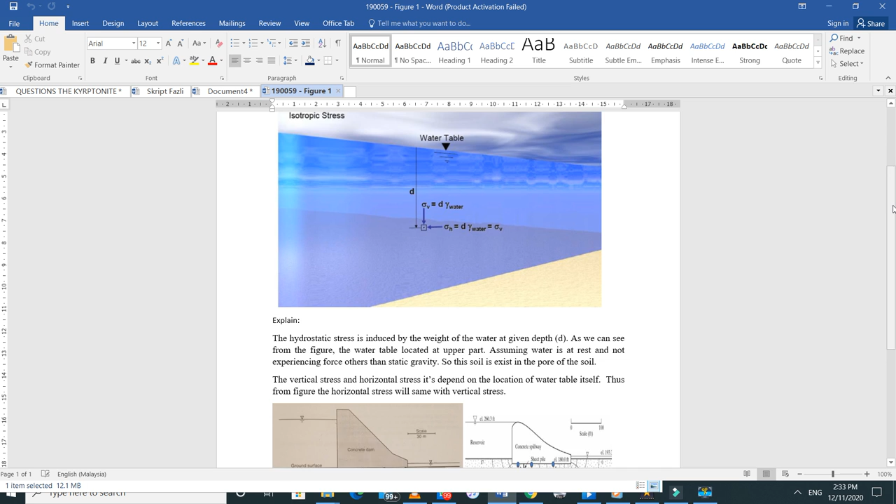Right, then what else can explain it? So some of you did explain about it being the same pressure, you want to find it at a certain depth, but based on depth the pressure will be higher. Because now we are talking about the unit weight of water, and unit weight of water also has a relation with gravity force and so on.

If you realize, vertical stress is equal to unit weight of water times D, or some of the books call it Z. Why Z, why D and so on? No, D is for depth, Z is also for depth, kedalaman, right? And then for horizontal stress it's equal to unit weight of water, also times depth, right? Same. So that shows it's equilibrium, same.

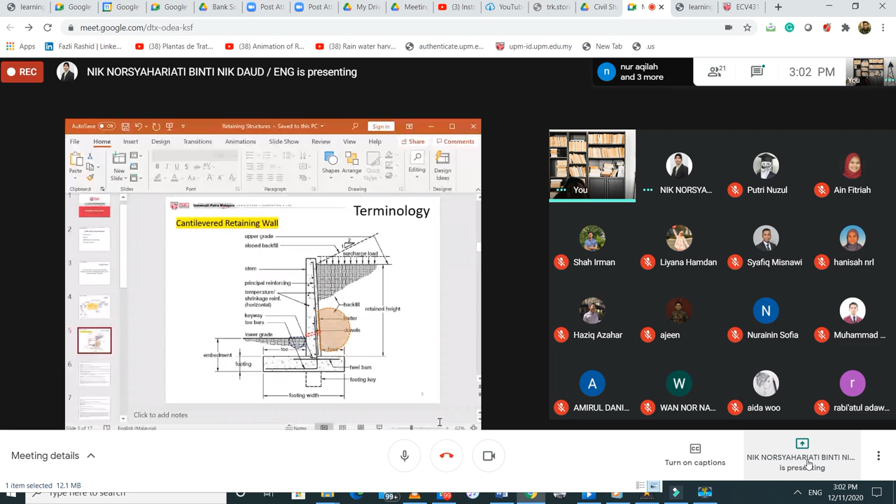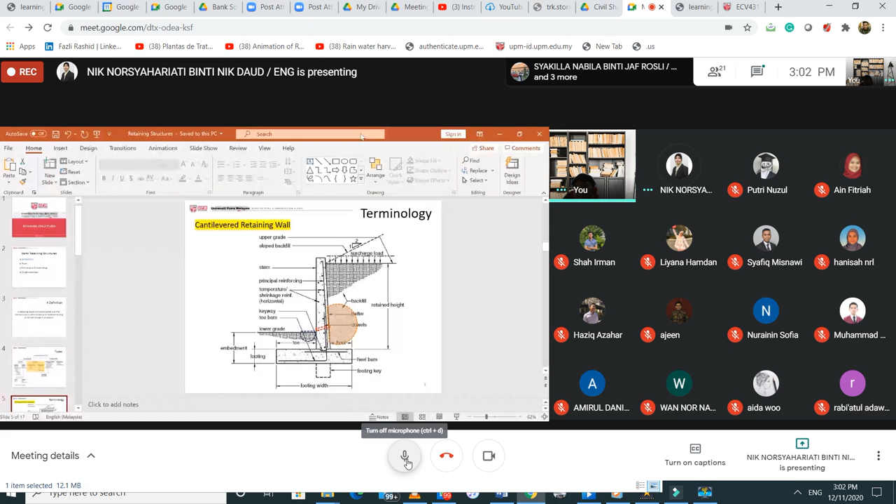You all tak stop saya, tengok saya bercakap je. Daripada yang first tu saya dah habis sampai 4, share 5. Entire screen okay ke doktor? Sorry? Entire screen boleh? Alright. Okay then, okay, right, for terminology.

Yang ni saya ambil daripada Brooks and Brooks, 2010, 10th edition, right? So yang ni kalau you nak tengok balik dalam terms of a big view punya ni, saya ambil daripada buku tu. Terminologi ni saya bukan nak kata you suruh memorize, but it's better if you can memorize, untuk cantilevered retaining wall ni, sebab retaining wall yang dipanggil cantilevered memang popular lah, kat Malaysia memang kita guna ni. It's very simple, and not saying that it's easy to design, but still.

Kat sini yang different daripada buku tu, saya ada tambah weep hole, dan some of the drainage kat sini longkang, dan some of the granular backfill. They use a backfill here, but it depends on which type of soil. Granular backfill ni keperluannya sebab untuk memastikan air boleh flow directly or easily to the weep hole kat sini, terus masuk ke drainage.

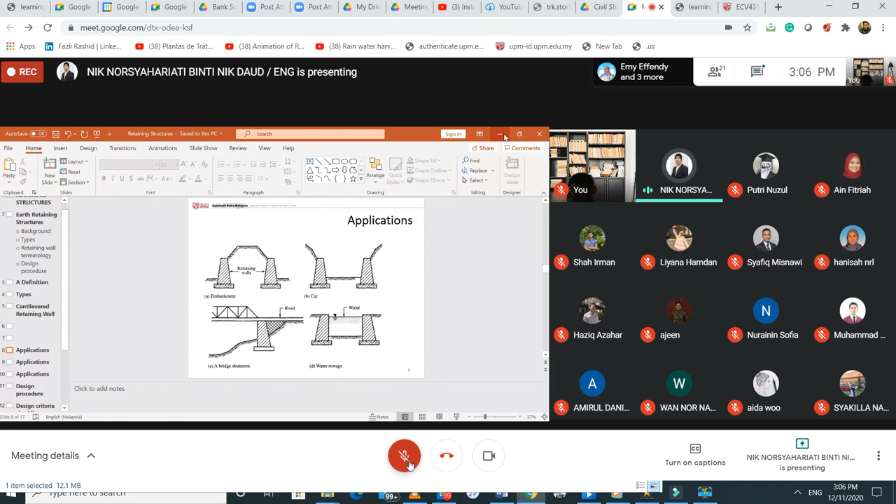Footing foundation yang paling simple sekali untuk you punya calculation. Alright, so ni pun saya ambil daripada buku tu, so you can just go through. Which is for each of the definition ataupun explanation about terminology atau terms yang digunakan, so application, some of it, ada explanation dalam books juga. Either one, your previous book, Craig's pun ada, boleh tengok balik. Then some of it, design procedure ni pun saya ambil daripada books, which is if you want to look at the design procedures, you need step by step method ataupun procedures yang you nak refer.

So it just goes back to your first assignment yang saya bagi, talking about the standard and regulation yang digunapakai di Europe, Britain, British standard, then some of Indians, and then Malaysian, Malaysian punya rules or regulation from JKR. JKR in English apa dia?

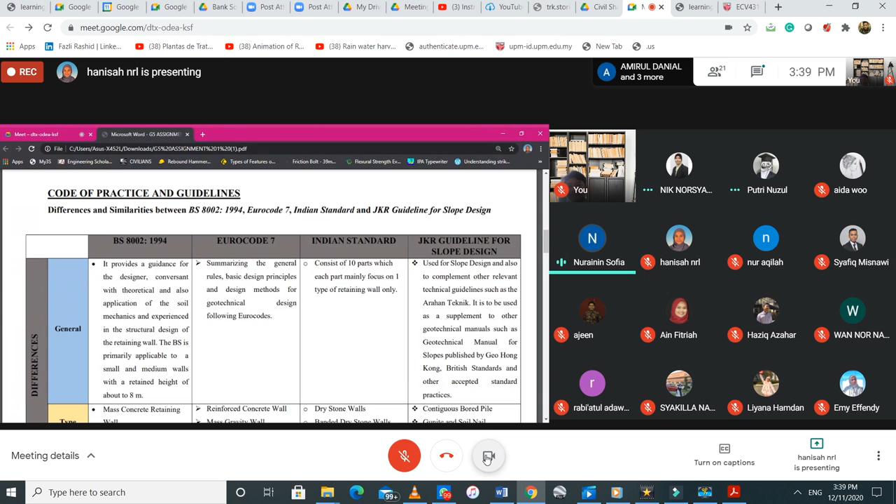Okay, focus on Indian standard and JKR. In general, Indian standard consists of 10 parts, each part mainly focusing on one type of retaining wall. For JKR, it is used as a supplement to other geotechnical manuals, such as the Geotechnical Manual for Slope published by Geo Hong Kong, British Standard, and other accepted standard practices. That is for the general aspect.

For the type of retaining wall, as you can see on the screen, these are the differences in the type of retaining wall for each code. For Indian standard, they have dry stone walls, banded dry stone walls, cement stone walls, gabion walls, RCC crib walls, timber crib walls, and more. For JKR standard, it consists of contiguous pile, RCC wall and micropile, RC wall and sheet pile, and other types of retaining wall. You can see there are differences in terms of type of retaining wall for these two codes. So next is the design criteria.

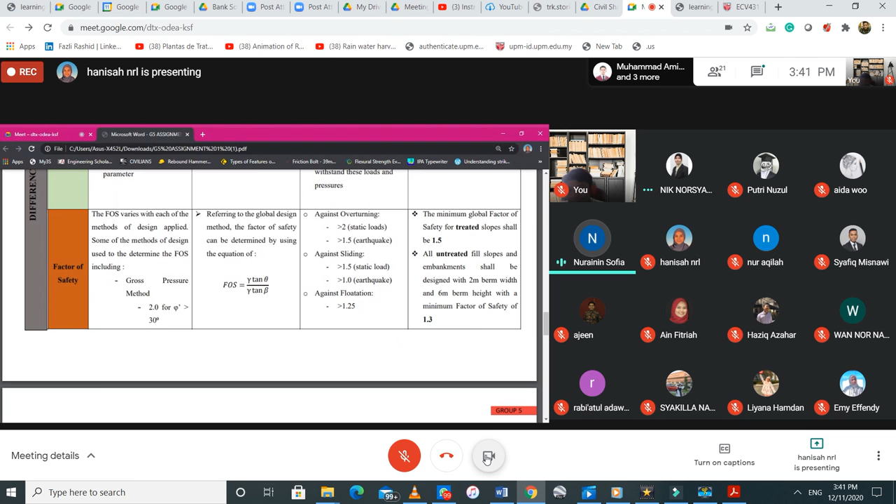For JKR, they mentioned that the minimum global factor of safety for treated slope shall be 1.5, and all untreated fill slopes and embankments shall be designed with 2 meter width and 6 meter height with a minimum factor of safety of 1.3. Okay, that is for the difference.

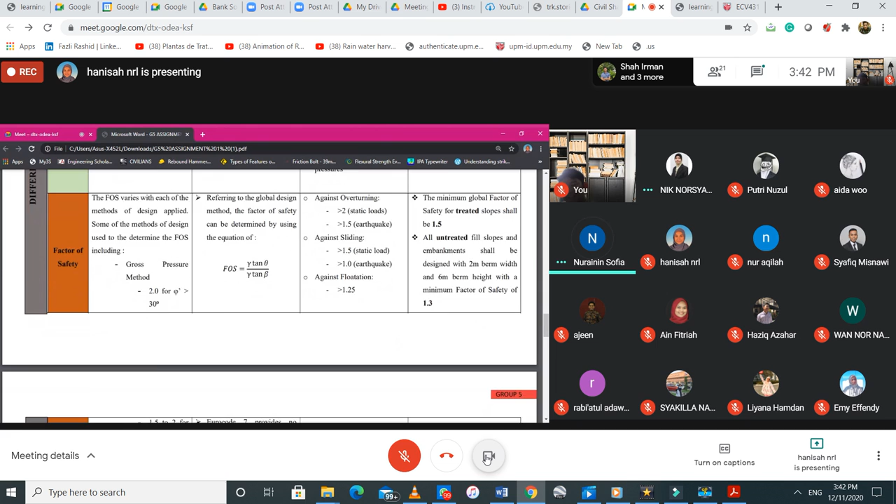For similarities, this applies to all 4 codes. All codes and practice guidelines above are used to design a retaining wall by providing guidance to the engineer. The objective for all codes is to increase the stability of the design slope and minimize the risk of slope failure.

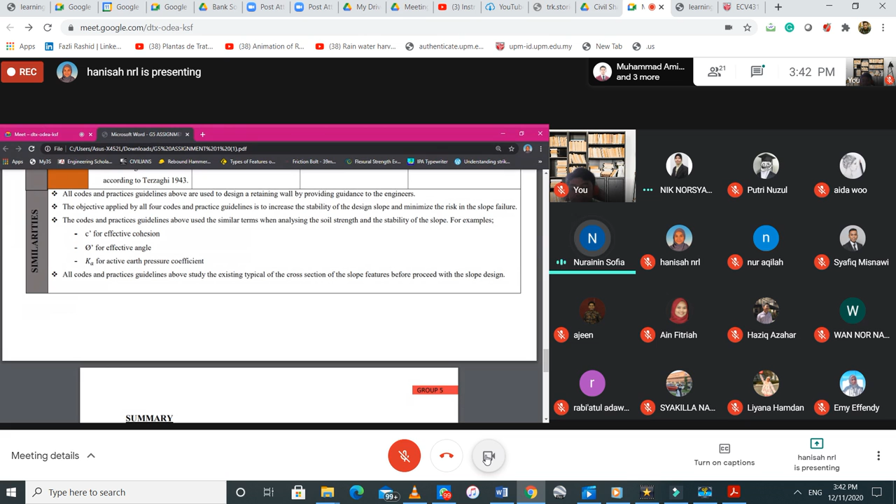Another similarity is that the codes use the same similar terms while analyzing the soil strength and stability of the slope, for example the clay symbol, the effective cohesion symbol, and the active earth pressure coefficient. The last similarity point is that all codes and practice guidelines above study the existing typical cross-section of the slope features before proceeding with the slope design. That's all, okay.

So any additional info from your friends, from your members?

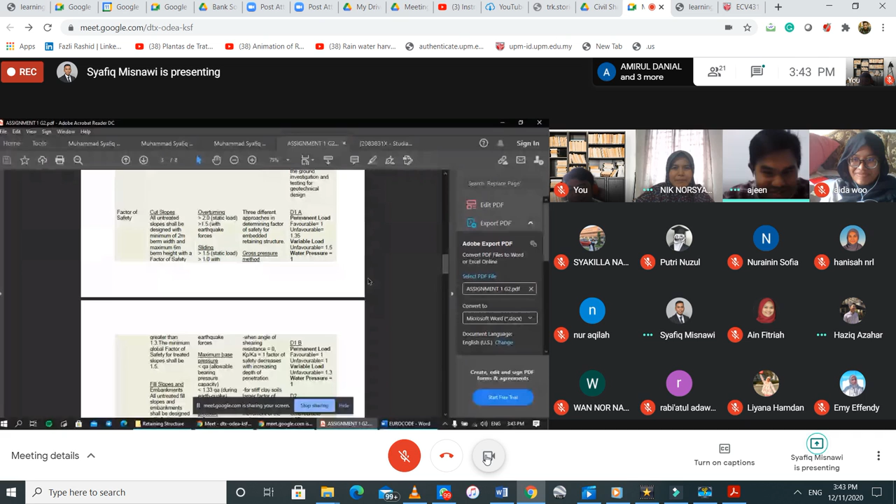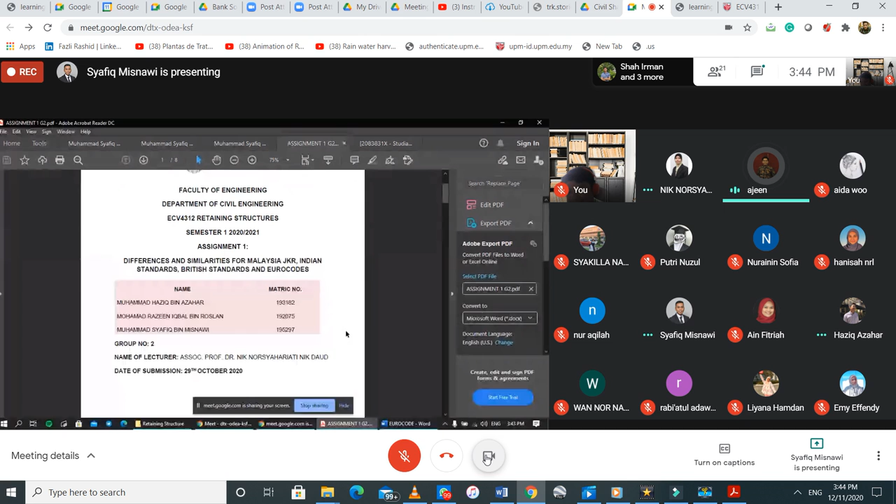Bismillahirrahmanirrahim. Assalamualaikum warahmatullahi wabarakatuh, very good evening to all. So we are from group 2. We will present the differences and similarities between two codes that we chose, which are the Eurocode and the British Standard.

So for the first part, in terms of overall, British Standard is a code primarily applicable to small and medium walls with a retained height of up to about 8 meters, although many of the recommendations are more generally applicable. For Eurocode, it summarizes the general rules, basic design principles, and design methods for geotechnical design. EN 1997 is concerned with the requirements for strength, stability, serviceability, and durability of structures. Other requirements such as thermal insulation or sound insulation are not considered in EN 1997. For seismic design requirements, EN 1998 should be referred to as it provides additional rules.

So for the second point, which is the scope: in British Standard, it is divided into 4 sections. Section 1 briefly explains the terms used and factors influencing and affecting retaining walls. Section 2 describes site and geotechnical data required together with material properties. Section 3 identifies the design philosophy and design methods for each retaining structure, including earth pressure and analysis of equilibrium stability.

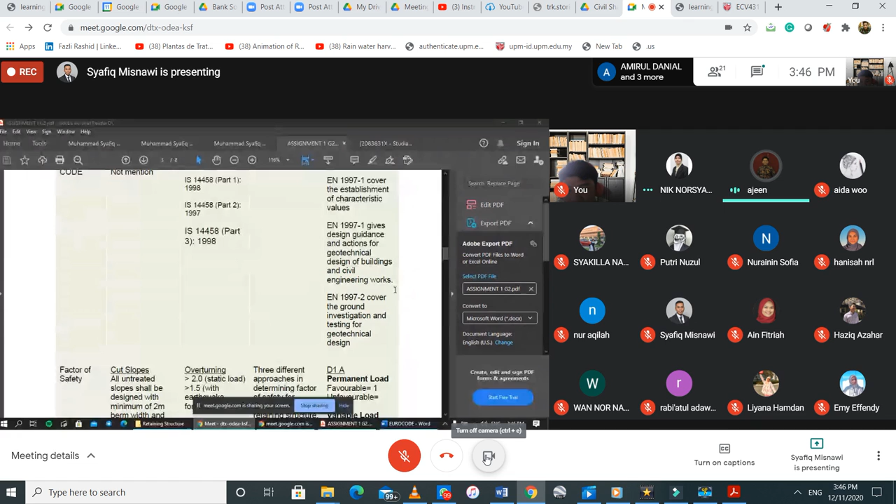I will continue with the factor of safety for British Standard. There are 3 approaches in determining factor of safety for embedded retaining structure. The gross pressure method is when angle of shearing resistance is 0, the factor of safety is 1, decreasing with increasing depth of penetration. For stiff clays, soils use a larger factor of safety to prevent failure of the wall. The net pressure method is based on horizontal pressure distribution diagram, derived from active and passive pressure, equivalent to a lower factor of safety than gross pressure. The next method is fixity method, with assumption of fixed earth support condition for pile wall embedded in sand, and the factor of safety is 1.

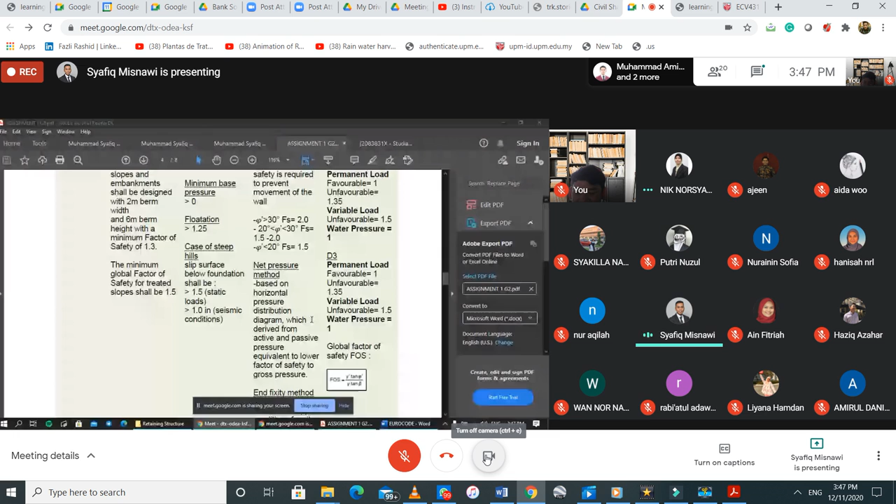For Eurocode, the factor of safety is based on partial factor of safety applied on load. The code is 1990 for state case D1A. There are 2 loads, permanent and variable, and each has favorable and unfavorable cases, as you can see the values here. However, based on the Eurocode shared by our friends, the global factor of safety was...

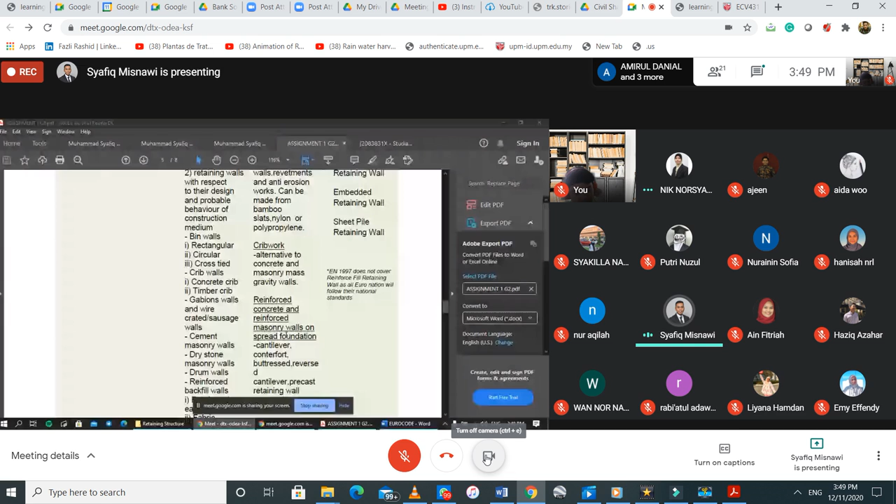Then for type of retaining wall, British Standard includes gravity concrete walls - simple form, battered face, battered back, step back, and battered masonry face. Gabions are large cages or baskets, usually steel wire filled with stone. Crib work, an alternative to concrete and masonry mass gravity walls. We also have reinforced concrete and reinforced masonry walls: counterfort, buttress, reverse, cantilever, precast retaining wall. We have embedded walls, which are cantilever, also known as sheet walls, built of contiguous interlocking individual piles or diaphragm wall panels to form a continuous structure. We have soldier or king piles, consisting of vertical members built in suitable centers with a system of ground support. We also have strutted excavation and cofferdams and waterfront structures.

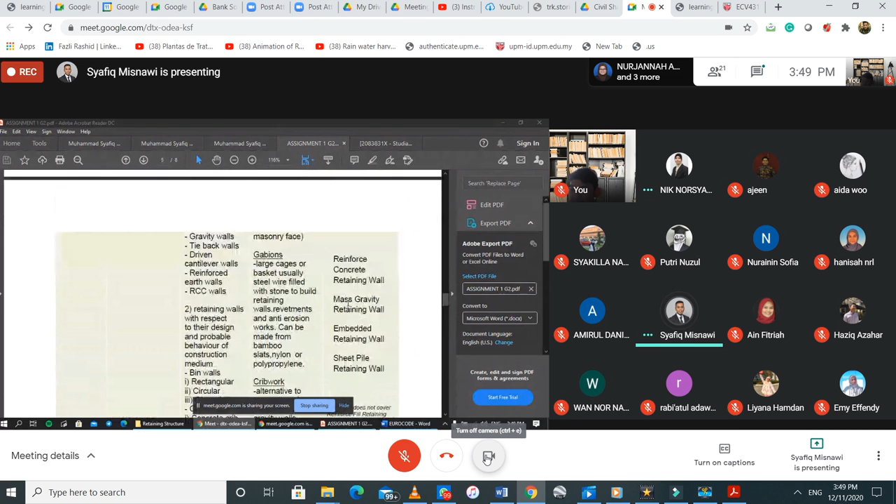For Eurocode, the types of retaining wall used are reinforced concrete retaining wall, mass retaining wall, and sheet pile retaining wall. EN 1997 does not cover reinforced fill, as all will follow their national standard, for example UK uses British Standard. Then I'll pass to Haziq.

Assalamualaikum, so I will explain about the design criteria and the surcharge. For British Standard, the design criteria is basically based on the design of a retaining structure by considering the interaction between ground and structure. So 2 sets of calculation, equilibrium calculation and structural design calculation, are required to determine overall proportion, geometry, size, and properties of structural section.

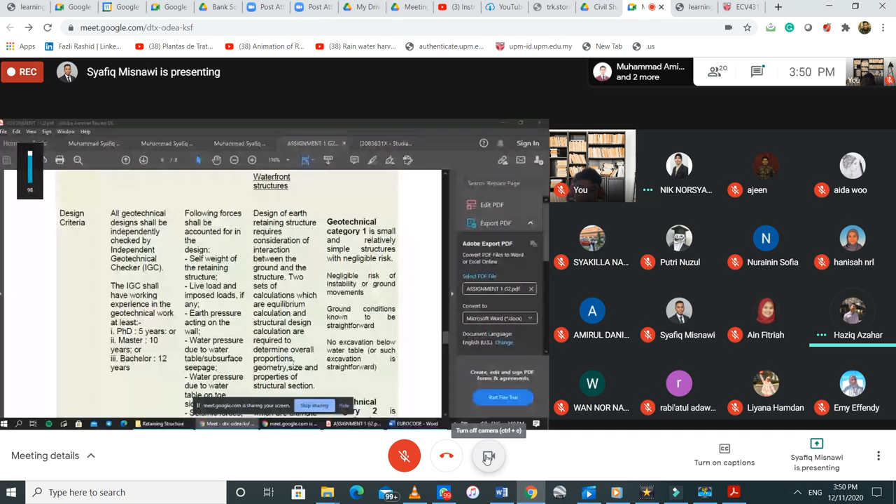For Eurocode, the design criteria is divided into 2 categories. The first category is for small and relatively simple structures with negligible risk, while the other is for conventional type of structure with no exceptional risk or difficulties in soil or loading condition.

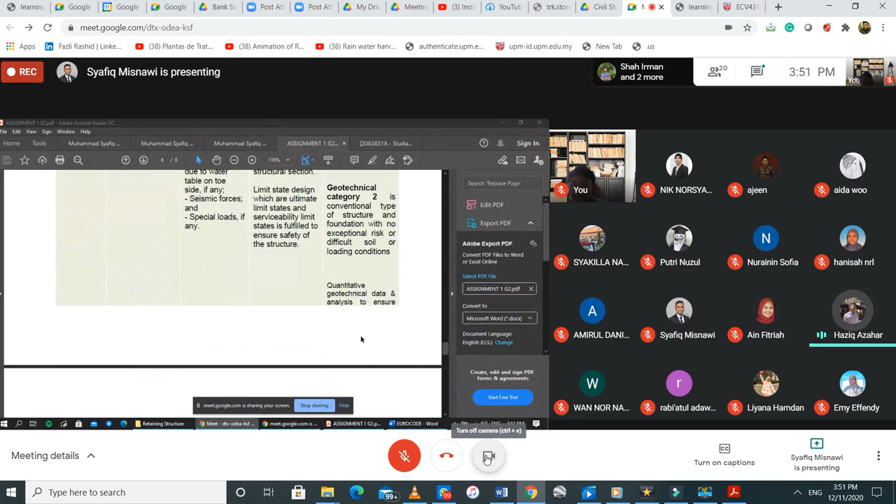For surcharge in British Standard, there is an obligatory minimum surcharge of 10 kN per meter square to be applied to the surface of retained soil in the design of retaining wall. Various surcharges imposed on a structure may be classified as UDL, continuous load on the surface, concentrated load, column footing, line load for strip footing, dynamic load for traffic, and impact load.

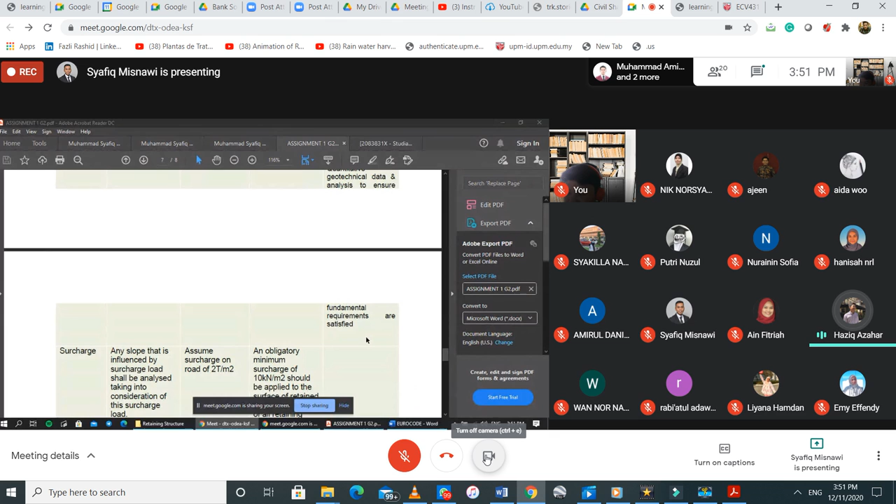However, for British Standard, we haven't found any yet. So for the question, we also didn't have any information details for Eurocode and also British Standard. So we proceed to similarities.

There are 2 similarities between Eurocode and British Standard. The first one is that Eurocode 7 and British Standard 8002/1994 both verify and define the type of retaining wall in the construction of the retaining wall. The second one is that the limit state and ultimate limit state in the design have been verified by both Eurocode 7 and British Standard 8002/1994.

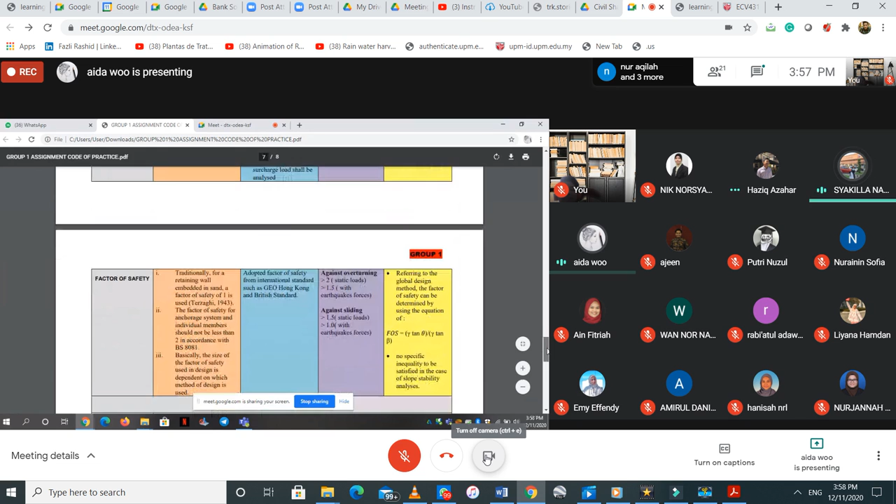For JKR, it adopted factor of safety from international standards such as GEO Hong Kong and British standard. I will pass to Daniel.

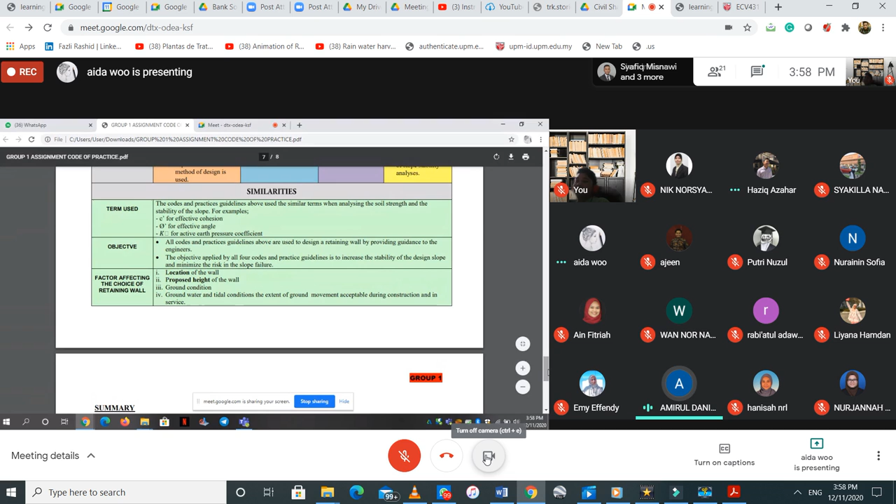Hi, Assalamualaikum, my name is Daniel Samsudin. I'll be explaining the similarities between all of the standards. As you know, all 4 codes of practice and guidelines are using the same terms, for example effective cohesion, effective angle, and active earth pressure coefficient.

For the objective, of course these guidelines are there in order for the designer to design the retaining wall, and the objective applied by all 4 codes and practice guidelines is to increase the stability of the designed slope and minimize the risk of slope failure.

We don't want the designer to build the retaining wall to fail. We don't want the designer to fail. So the guides are there for designers to refer to.

And lastly, what are the factors affecting the choice of retaining wall. For all 4 codes, they stated that it's important to know the location of the wall firstly, and secondly the proposed height of the wall. Third, and most important, is the ground condition - we must know the soil strata, the soil behavior, the bearing capacity, and last but not least, the groundwater and tidal condition, and the extent of ground movement acceptable during construction and in service.

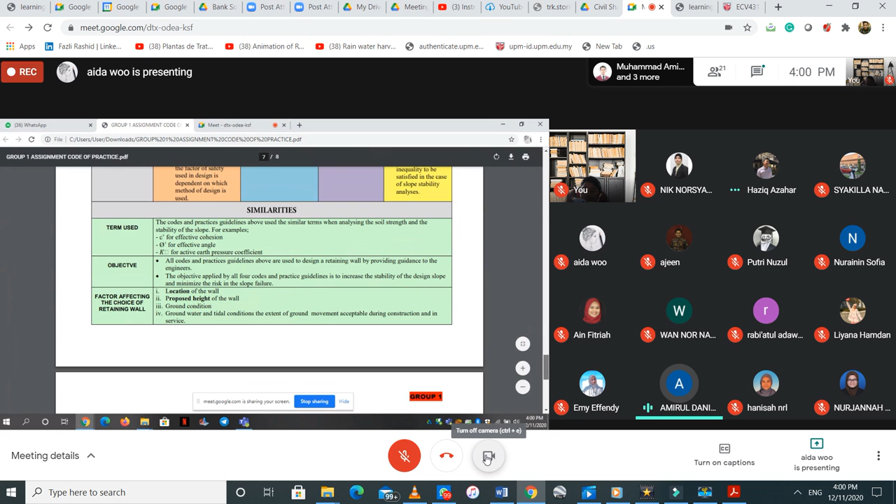For example, if you want to build a retaining wall beside the sea or beside the highway, all of these factors will affect the choice of retaining wall that the designer is going to choose. So that's all from my group. Thank you for listening and have a great day.

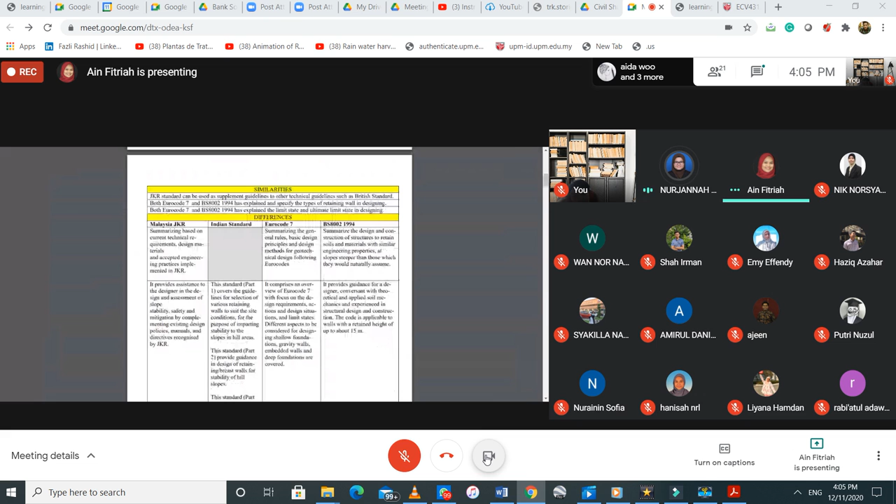That's all for differences and similarities from Group 1. Okay then, thank you.

So next, Group 3. Right, which code do you want to share with us? We wanted to share the differences and similarities between JKR standard and Indian standard.

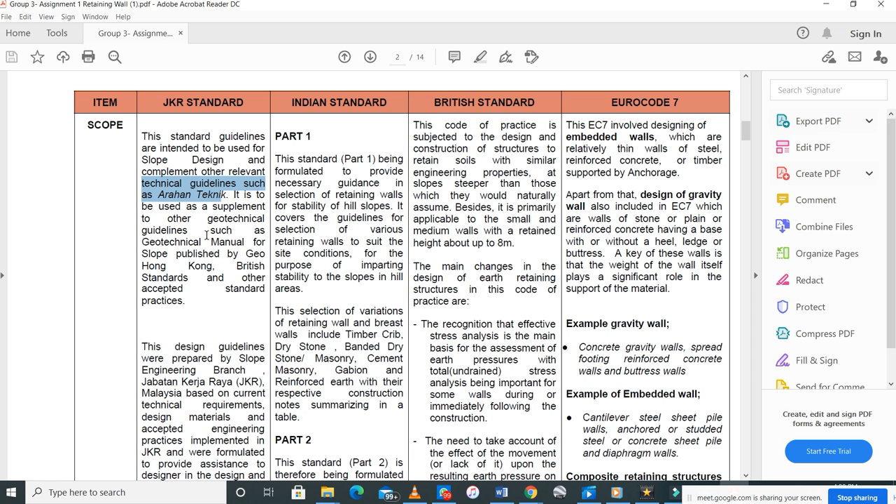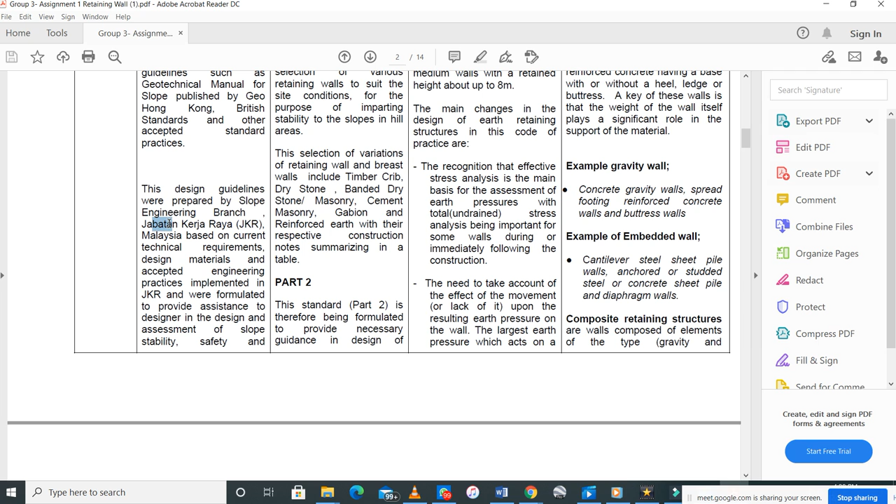Okay, so we're going to present about the differences and similarities between JKR standard and Indian standard. Based on scope of work, JKR standard is intended to be used for slope design and complement other relevant technical guidelines such as Arahan Teknik Jalan. This standard is also used as a supplement to other geotechnical guidelines. The design guideline of JKR standard was prepared by the Slope Engineering Branch, Jabatan Kerja Raya Malaysia, to provide assistance to designers in assessing slope stability, safety and mitigation.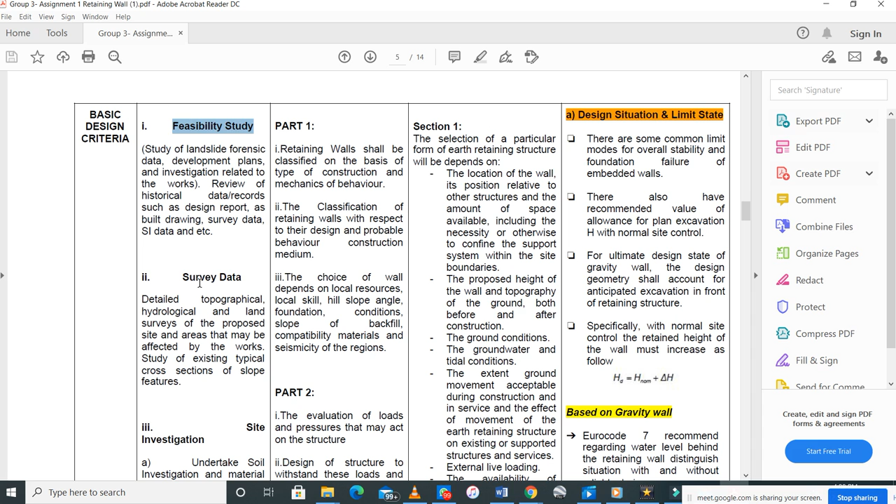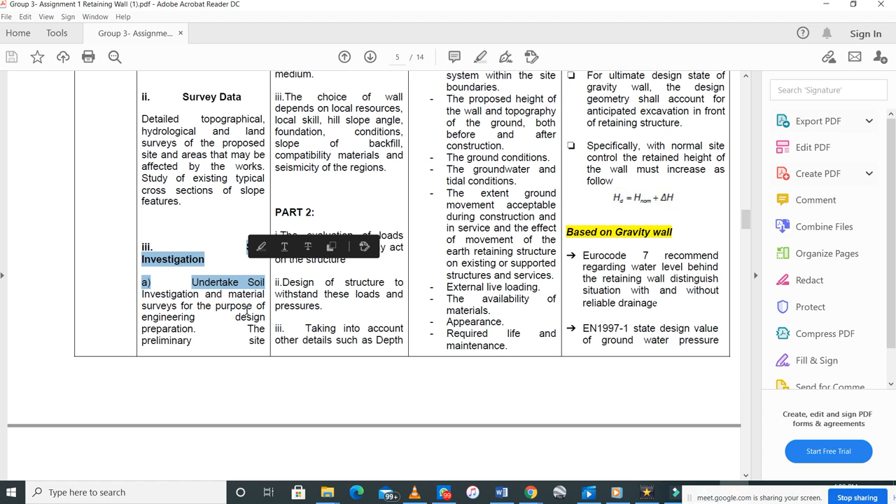On the basic design criteria, scope and methodology used for JKR standard: first is the feasibility study, which reviews historical data or records such as design reports, as-built drawings, survey data and SI data. Next is survey data, which requires topographical, hydrological and land survey. Third is site investigation, where they undertake soil investigation and material survey. All site investigation works should comply with British Standard and the Geo Hong Kong Guide to Site Investigation, as well as JKR specification.

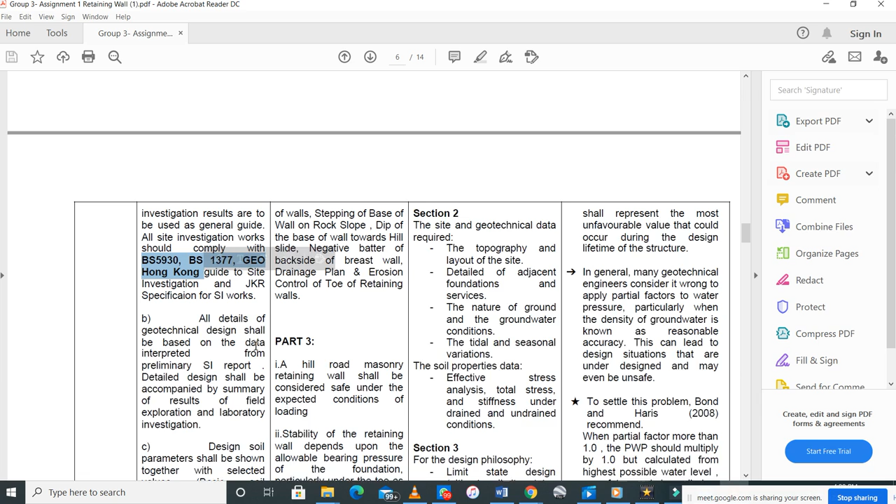The next one is engineering geological mapping and investigation, with geological mapping of the subject area carried out at appropriate scale. Next is independent check on slope stabilization, where all geotechnical design should be independently checked by an independent geotechnical checker.

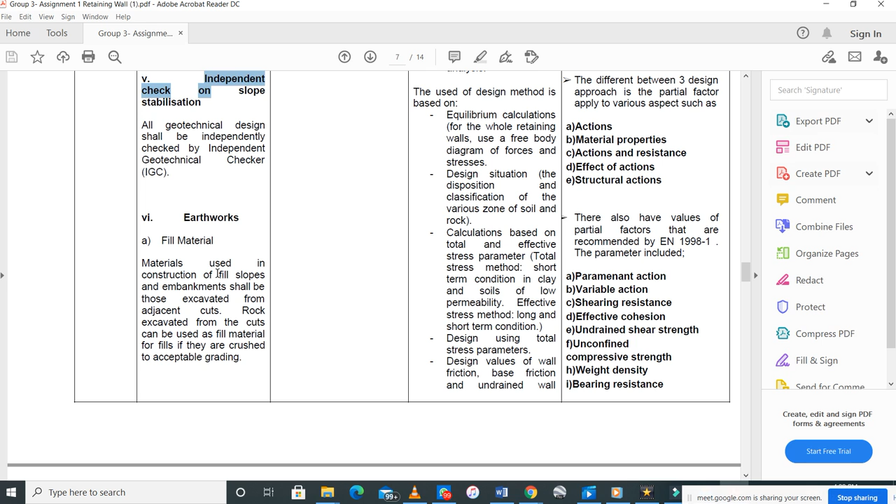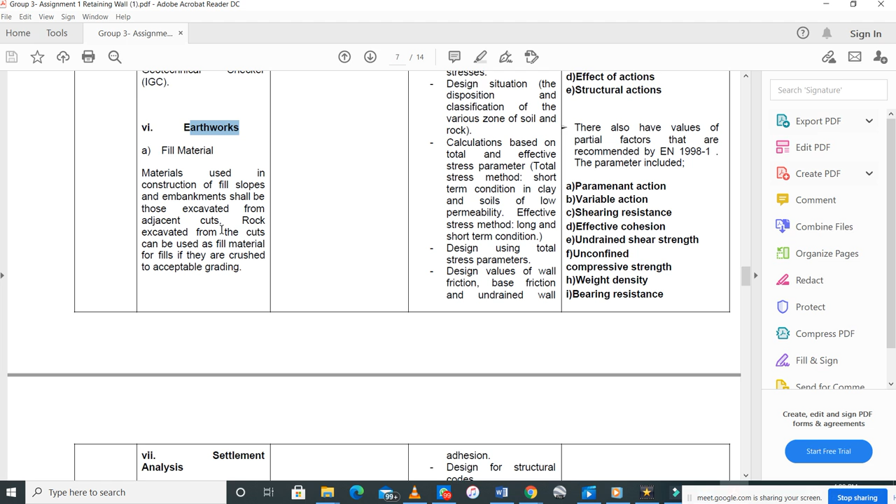Next is earthworks. Under this section, for fill material, the material used in construction of fill and embankment should be excavated from adjacent cuts. The next one is settlement analysis, which should be carried out for the fill slope and embankments depending on the subsoil condition.

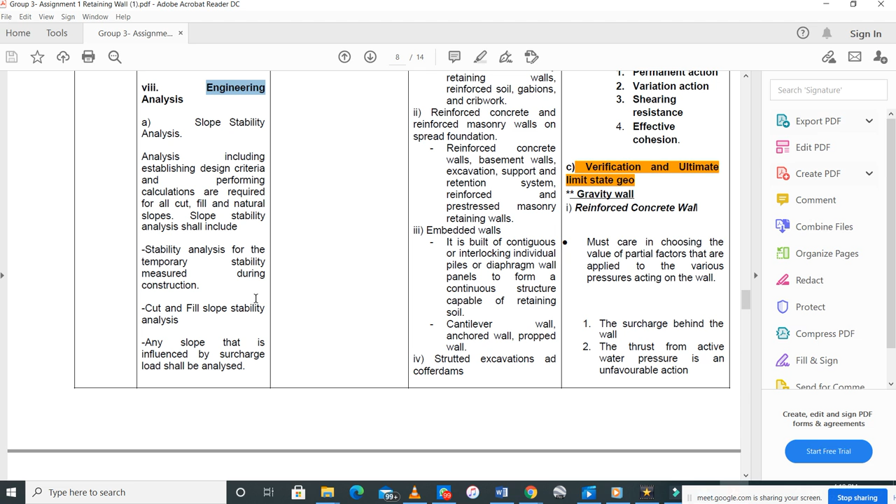The next one is engineering analysis, where slope stability analysis is obtained, including establishing design criteria and performing calculations such as for cut, fill, and natural slopes. Next is for rock slopes, where preliminary consideration can be used.

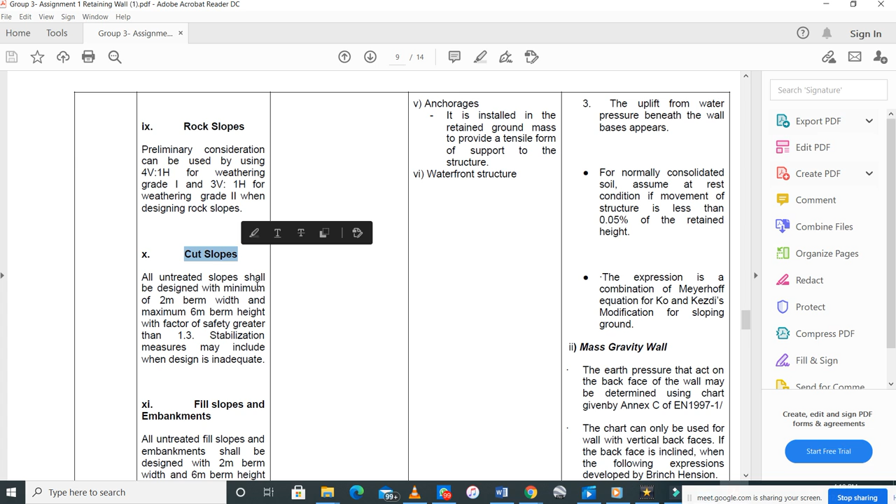Next is cut slopes. All untreated slopes should be designed with a minimum of 2 meter berm. Next is fill slope and embankments, and then drains, where surface drain and subsurface drains are considered.

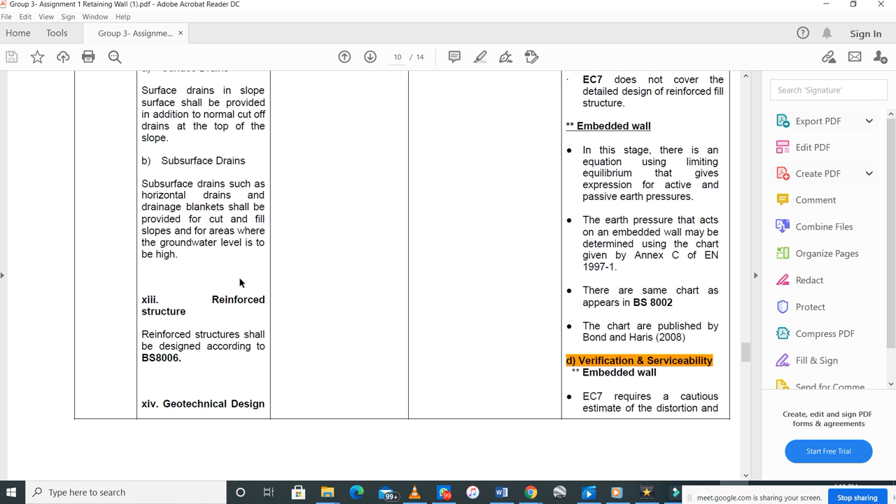The last one is reinforced structure, which should be designed according to the British standard. Their geotechnical design used for geotechnical works is designed according to the factor of safety shown in Table 6 of the standard. Okay, that's all for JKR standard.

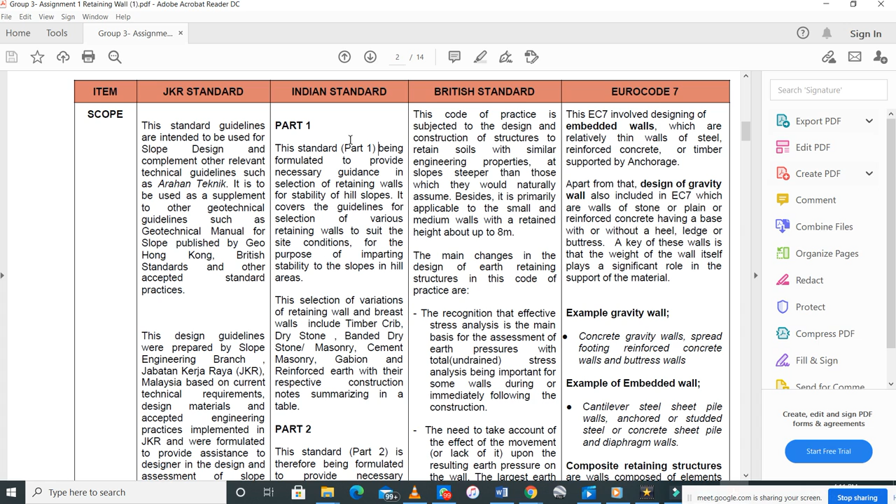Okay, now we continue the presentation on Indian standard. As for Indian standard, I will summarize it. Actually, Indian standard is a design guideline on choosing the suitable retaining wall for hill slopes.

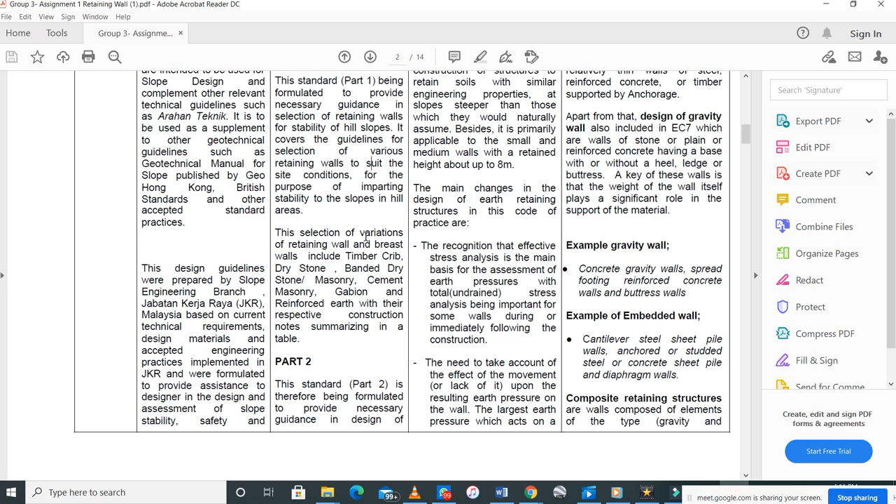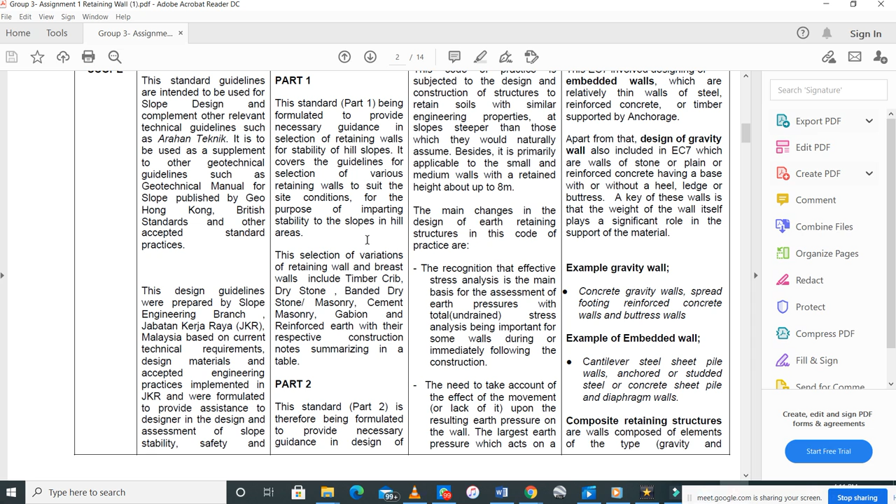For Indian standard, they choose the retaining wall based on the type of construction and the construction requirement. So there is not actually a rigid guideline for Indian standard. They use the standard based on the type of material used, the type of construction needed, and the method of construction, something like that.

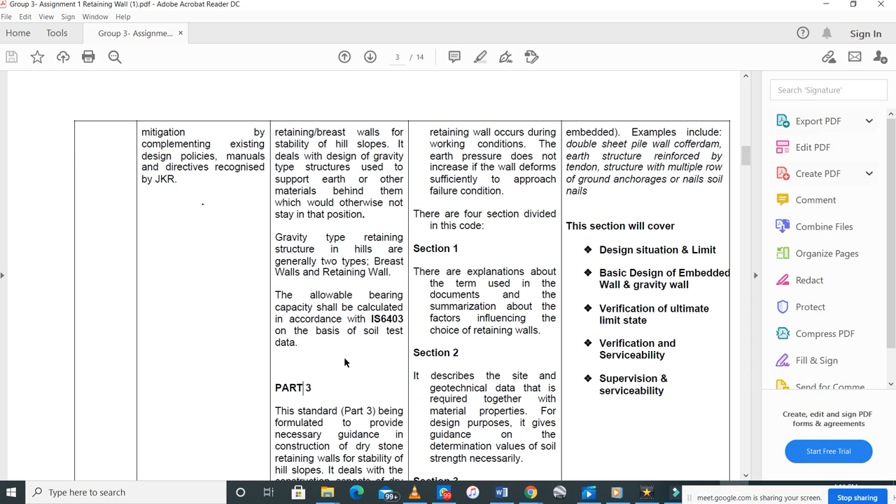But the Indian standard also must follow the allowable bearing capacity in accordance with IS 6403. In order to choose the suitable retaining wall, they use Indian standard 6403. I will explain briefly regarding the basic design criteria for Indian standard.

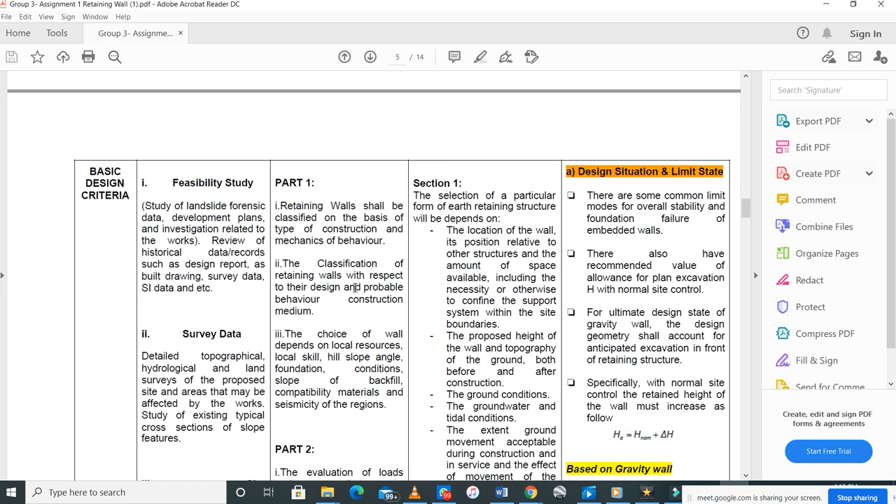On retaining walls, the type of retaining wall is chosen based on conditions such as type of construction, the mechanics of behavior, and the local resource. Actually local resource means what skills are present by the people on that site.

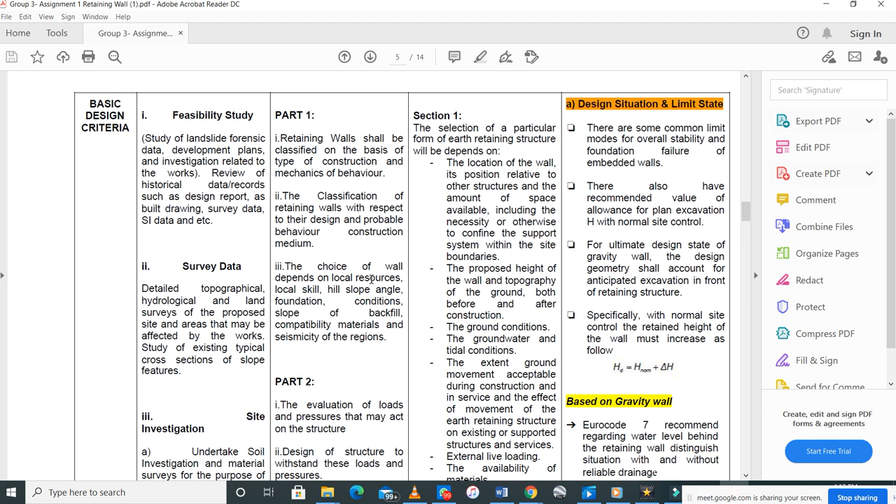The local resource is what resources are available on that particular site. To establish the retaining wall, they need to know the local resource available on site, and also the seismicity of the region. Seismic relates to earthquake or earth movement, so they need to know this in order to construct the retaining wall.

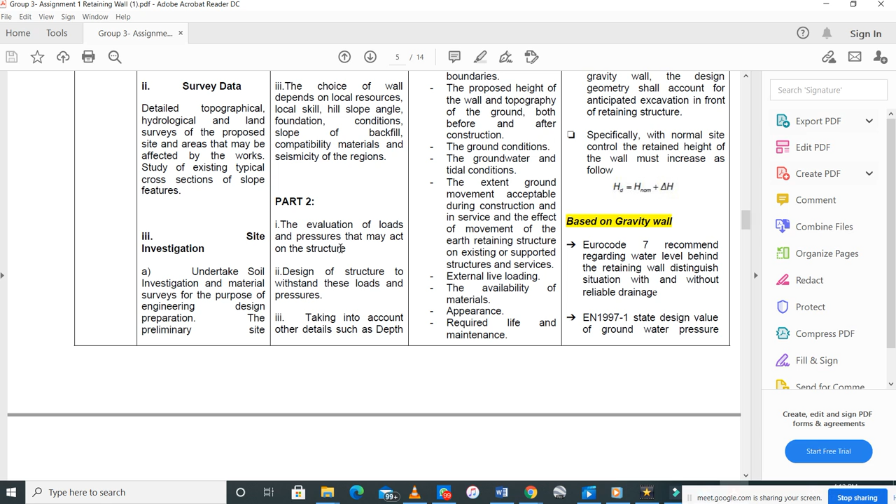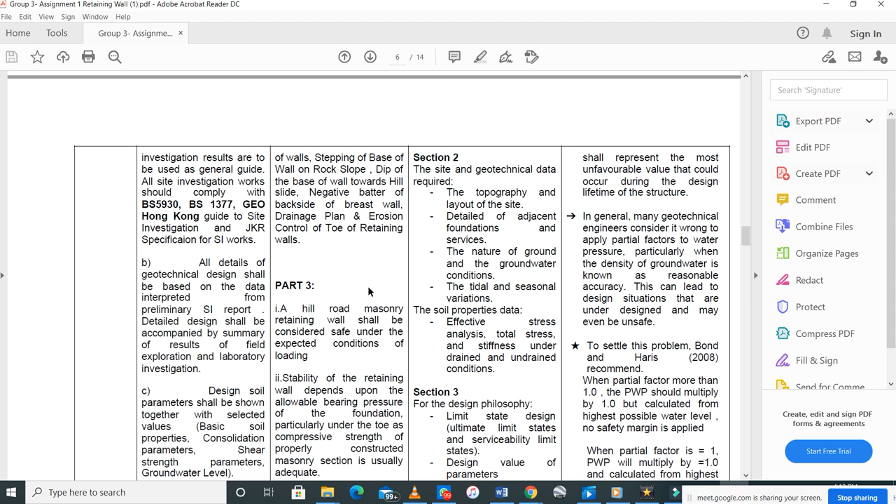They also take into consideration the loads, such as live loads and dead loads. These loads are needed as one of the design criteria for the retaining wall, because if we do not know all these loads, there are no particular guidelines, and we would be waiting for the project to fail because we don't know the exact loads.

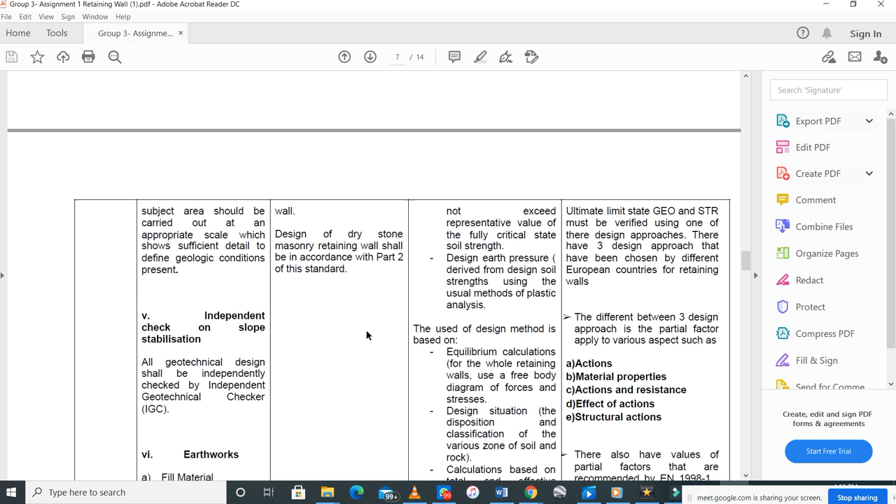We also need to take into consideration the depth of walls, the drainage and the erosion control. All these are under Indian standard, and most important is the stability of the retaining wall against loading.

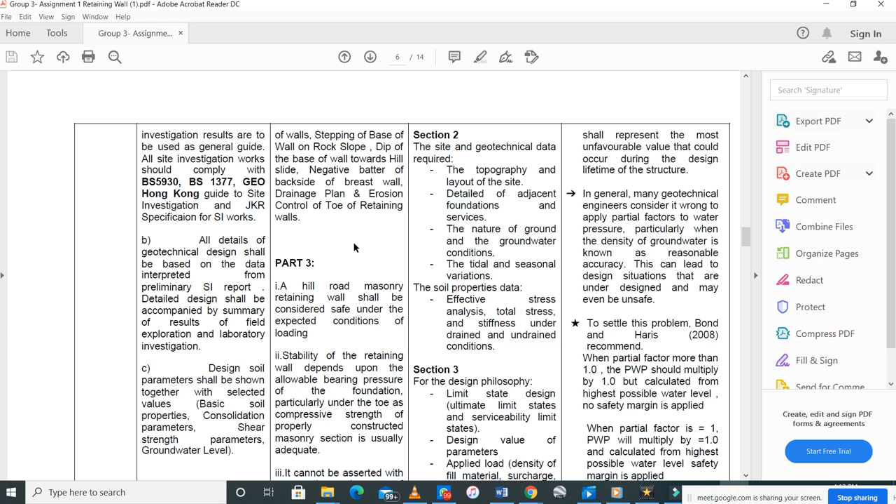As for similarities, there are no similarities between Indian standard and JKR standard, and also British standard, Eurocode 7, and so forth, because this standard actually depends on the construction condition. So I think that is all for me. Thank you.

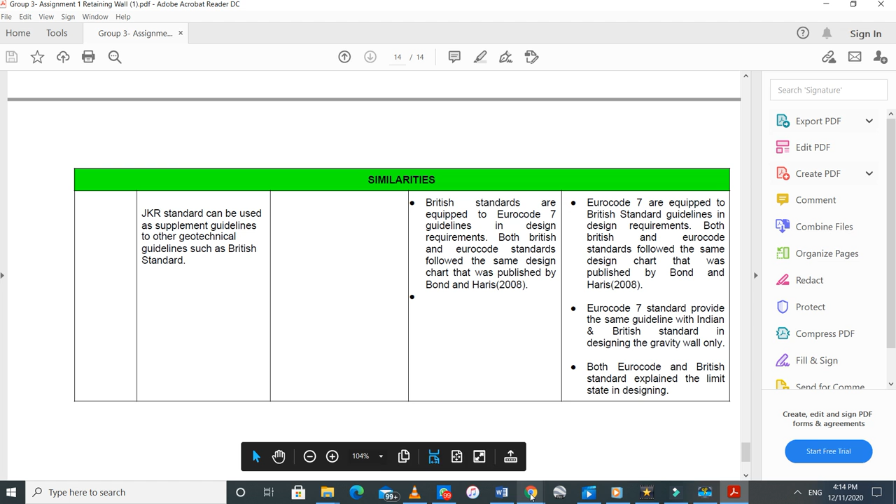So last, final group. Group 6. My group. Group 6, Doctor. Group 6.

So which code do you want to compare and find the similarities?

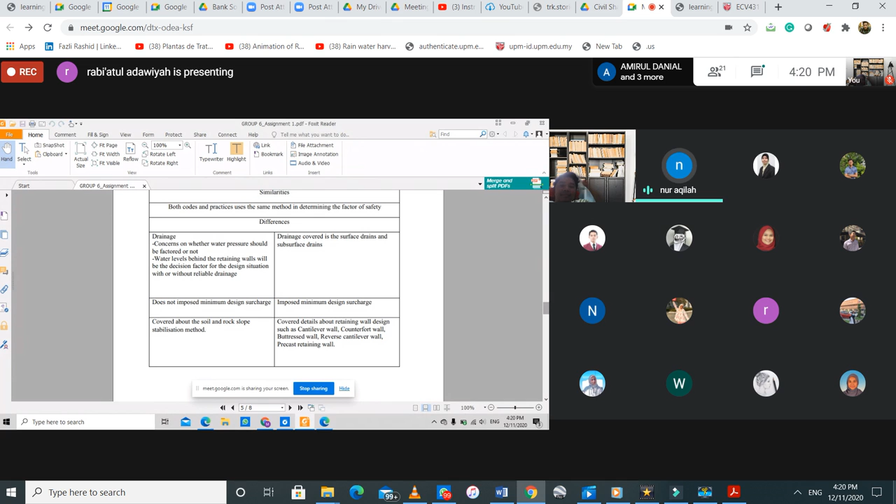Okay, for Eurocode 7 and JKR, the similarity is the site investigation, geological mapping investigation method carried out, and also design soil parameters by field exploration and laboratory investigation. For the differences, Eurocode 7 is for geotechnical design that summarizes all general rules, basic design principles, and design method of geotechnical work following the Eurocodes. For JKR, it's intended to be used for slope design based on current technical requirements, design materials, assessment of slope stability, safety and mitigation by complementing existing design policies, manuals, and directives recognized by JKR.

Also for Eurocode, it explains the design of gravity walls, embedded walls, slope stability, supervision, monitoring, and maintenance. For JKR, it explains the soil slope stabilization method and road slope stabilization method. For Eurocode, the design involves the ULS, SLS, and partial factor situation, and also slope stability focusing on retaining structure, excavation, slope, embankment, foundation, etc.

For JKR, geotechnical design criteria for geotechnical work are shown, and slope stability focuses solely on slope design, and slope stability analysis is required for all cut, fill, and natural slopes. Also, overall slope stability analysis for Eurocode focuses on the relevant limit states, and verifies the overall moment and vertical equilibrium of the sliding mass.

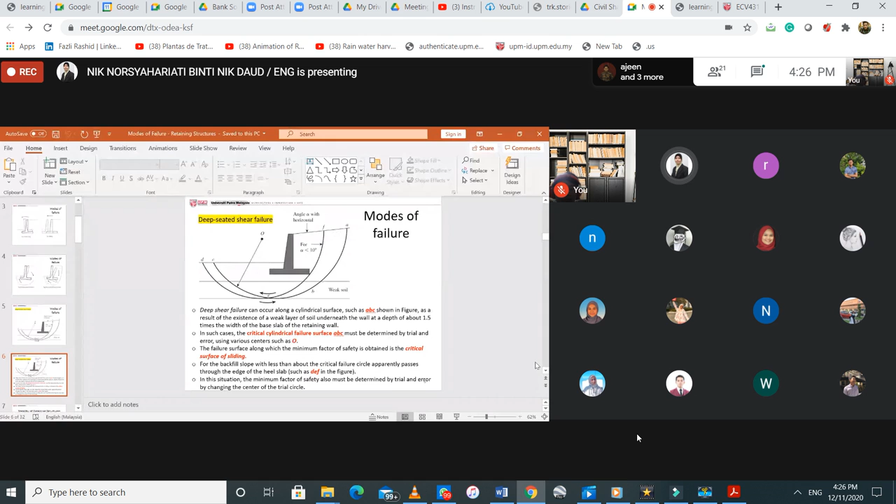Because earlier we talked about those lateral earth pressures - active, passive, at rest. So at the end of it, of course, we want to implement or apply those stresses in the application part, which is the application part that I want to stress here.

You want to check the factor of safety against these 3 things - this is the most important. Overturning, check for sliding, and check for bearing capacity. Some of the codes seem to focus only on overturning and sliding, and then some part in terms of the structure itself, but the major part should cover these 3 checks.

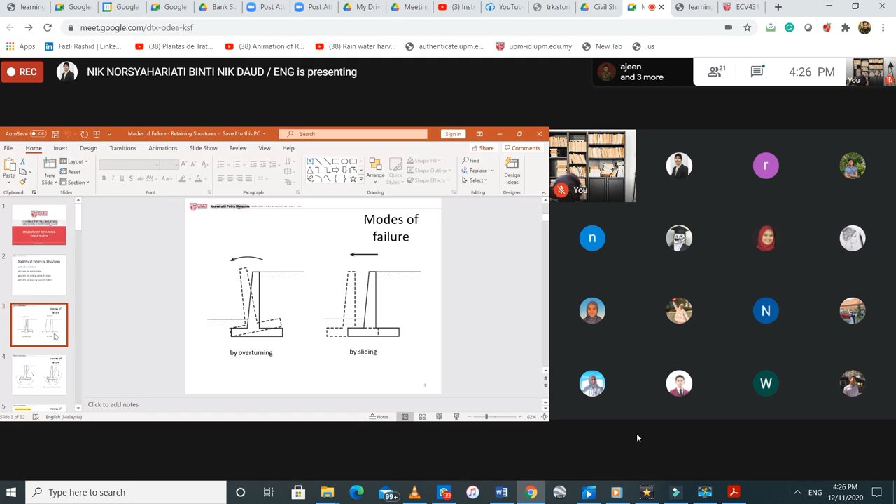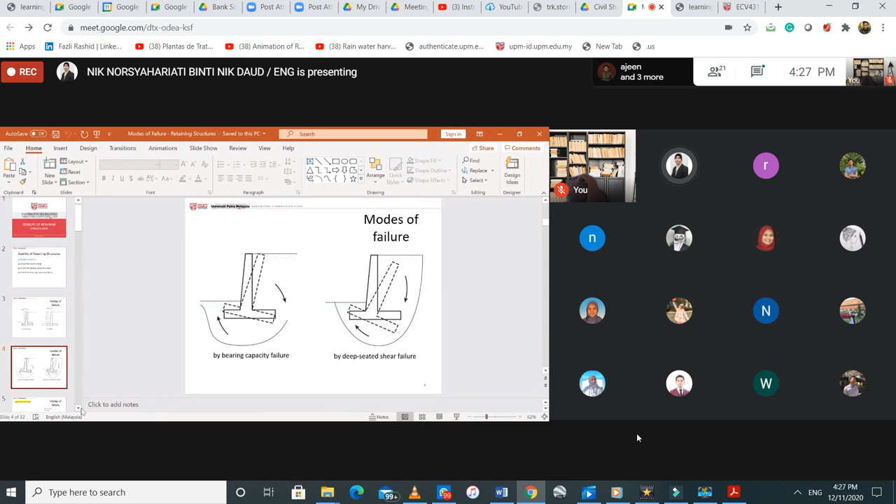And bearing capacity, and some covered by the deep-seated failure, which is more on the bearing capacity part. Those deep-seated failures combine with settlement, right? What I want to highlight, you can read later for the explanation of the modes, etc.

Okay, so talking about overturning, checking for overturning, right? You can go through - as I said before, we want to focus on the gravity wall, retaining wall with gravity wall. This is the easiest for you to digest actually. There's a lot of examples regarding the type of wall, etc. But then of course you need to focus on each part of it. I took this part because it's easy for you to look at and compare.

Okay, so for the cantilever and then for the gravity retaining wall, you can compare which part is which, etc. But the main essence or important point is those three checks you need to check as an engineer - earlier I said designer, I mean engineer. You are the engineer, designer is more on architect side. You are the engineer, so you want to engineer whatever you want to construct based on the rules.

So for checking overturning, of course there are a lot of equations you can refer to, like in the codes, standards and codes of practice - they lay out everything, examples, equations related to it. But it just goes back to what you want to calculate actually - is it the active force, passive force, at rest force, or just active or passive? Look at whichever one you need.

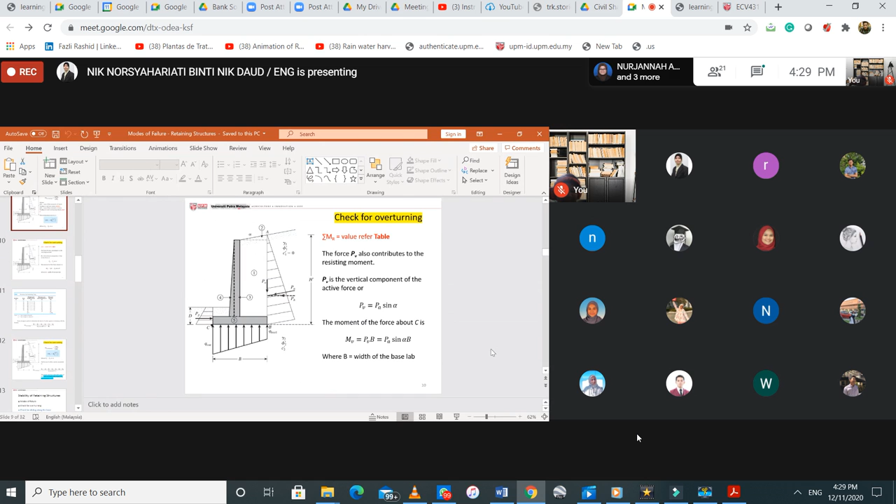Those cantilever walls only got 5 parts, but gravity walls got 6 parts. So you just need to focus on specifying which design you want to check or calculate.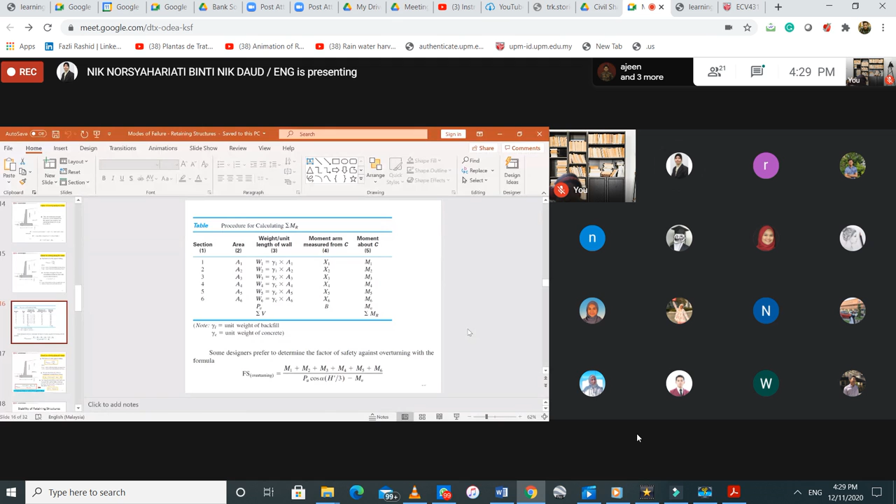So check for overturning, then check for sliding, then go through each of it. These notes I took from Braja M. Das, and some part from Craig. So for sliding and overturning, they have the factor of safety that you need to follow.

For which part you want to check, factor of safety for sliding is minimum. This is minimum, meaning above that is very safe. But if minimum is less than about 1.5, it means you need to redesign again. Redesign means recalculate again, and decide which part you need to amend or modify.

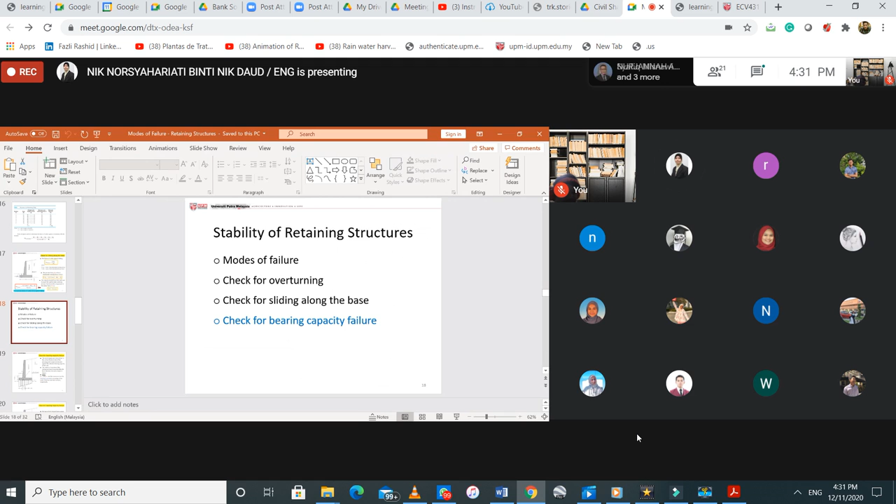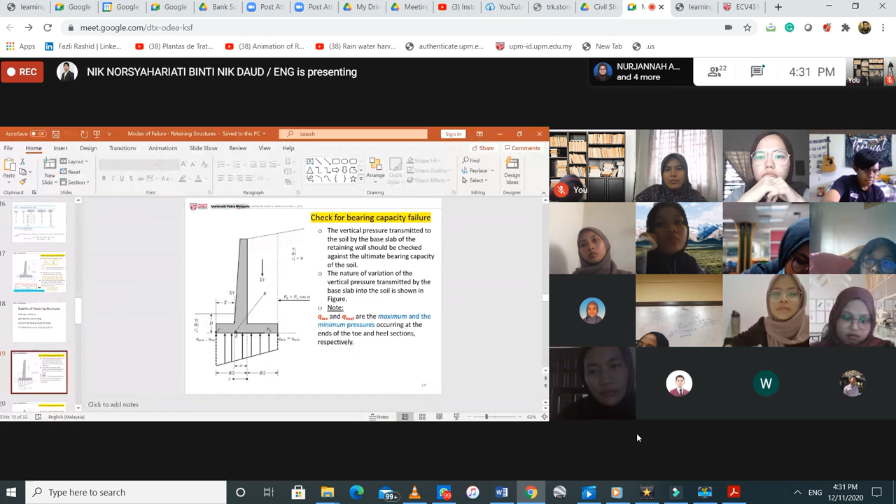Then at the end of it is bearing capacity failure. For this, you need to refer back to your foundation engineering notes. This is more on ultimate bearing capacity for the soil itself, so of course it relates to calculating the footing or foundation towards the soil.

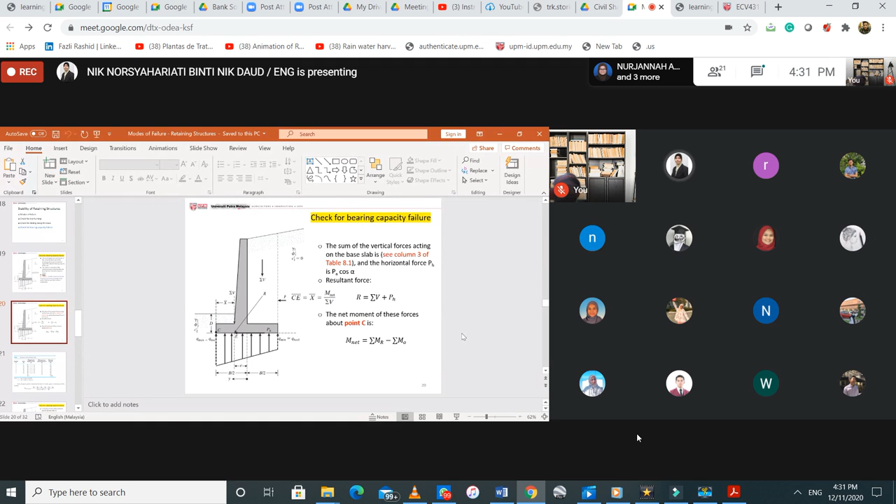So here we want to highlight the maximum and minimum pressure, this is what you need to calculate. So talking about that, you may find terms like eccentricity, the distance from E, etc. For that you can refer back to your foundation notes.

So again, checking about calculating the vertical force and the moment, resistance, etc. The rest is something like following step-by-step things actually.

Factor of safety for bearing capacity, normally we refer to FOS equals to 3, because it's close to the foundation's factor of safety.

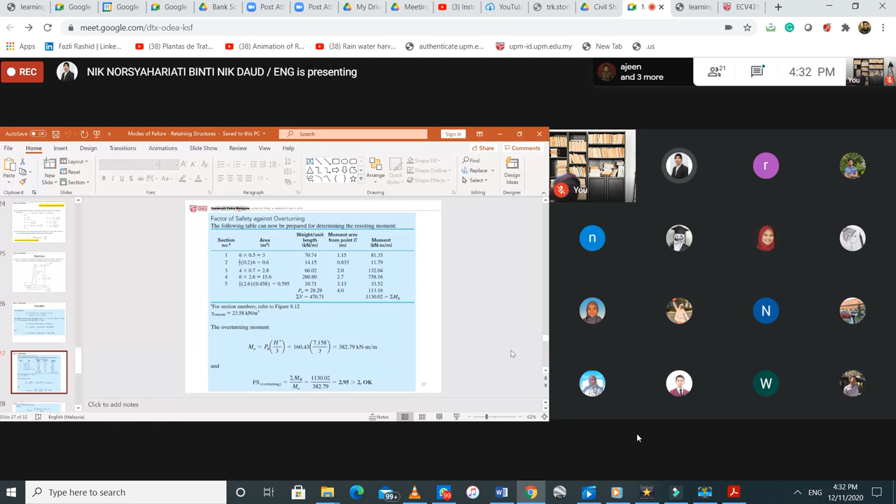So here I share some examples with cantilever retaining wall, then of course with their solutions, covering how to find and check the overturning, check the sliding, and then check the bearing capacity, to see which is safe or not. So you need to look back at those factors of safety that refer to each condition.